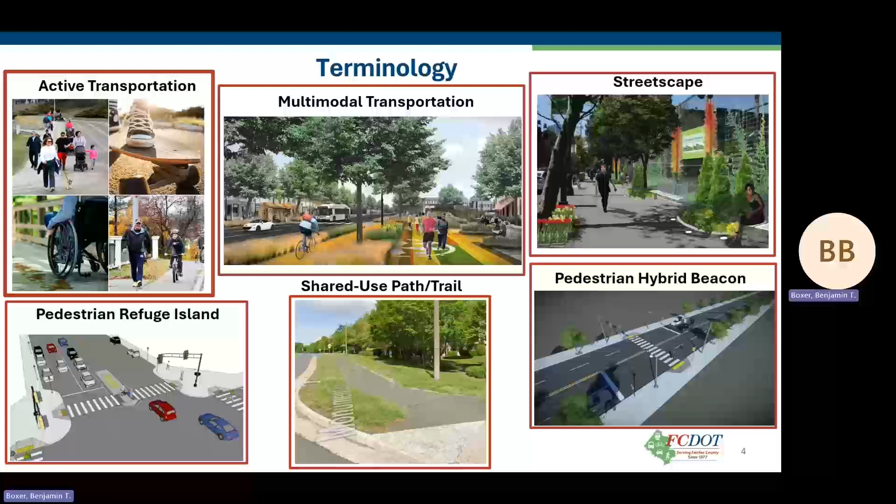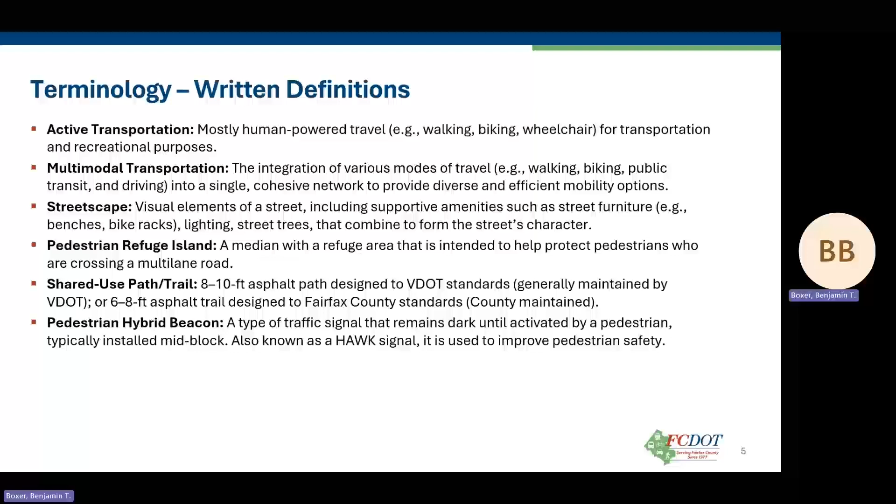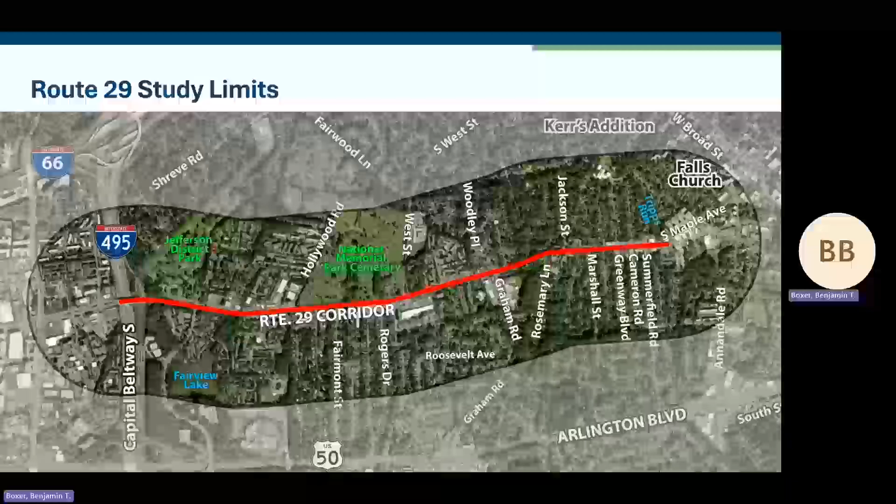Let's talk about why we're conducting this study. Route 29 is a complementary roadway to both Route 50 and I-66. With capacity upgrades recently made to I-66 and with Route 50 being a limited access roadway, Route 29 could focus on active transportation and transit use.

As part of this study, we're evaluating the pedestrian and bicycle access to Route 29 and aiming to provide safe and comfortable facilities while not impacting the traffic flow. Existing transit facilities will also be evaluated to include better bus stop amenities and improved access to transit. In certain segments, Route 29 includes service lanes that are primarily designed for vehicular access, but could potentially be used for sidewalk and cycle path improvements.

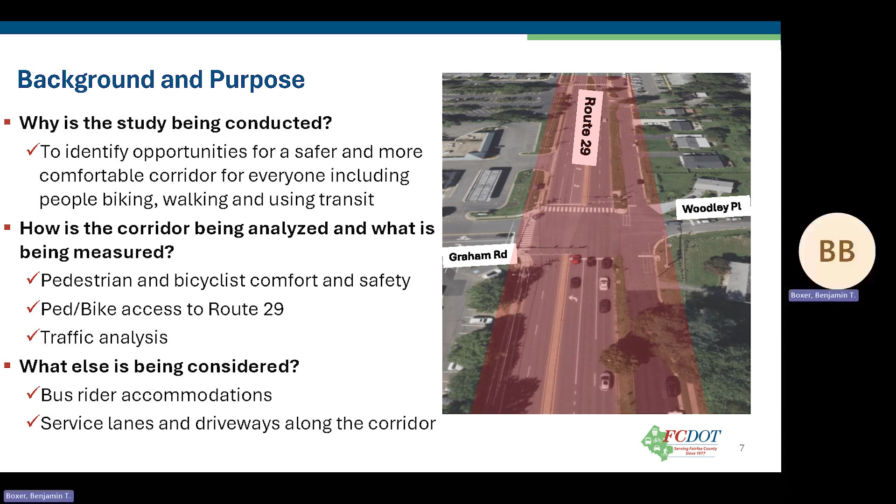In summary, our goal for this study is to create a better connected network for all users by filling gaps and providing safer and comfortable facilities, improving pedestrian and bicycle activity and transit usage, increasing driver awareness towards all users, and ensuring that the community's goals and actions are aligned.

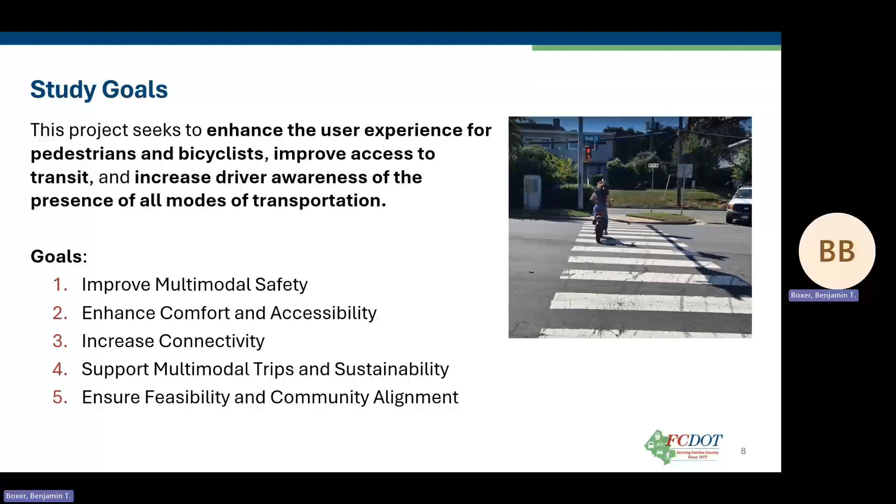Let's talk about the steps we will use to conduct this study. We are currently in the process of conducting an existing conditions analysis, which includes the assessment of all existing facilities for all users, including pedestrians, bicyclists, transit, and vehicles. Your perspective and experience is very important in this stage of the process.

We would like to know your concerns based on your day-to-day travel needs, which will help us identify improvement options. We'll talk about how you can share your thoughts in just a few moments.

After processing the feedback and completing the future conditions analysis, we will hold another round of public meetings with recommendations for improvements, possibly by early spring 2026. After receiving feedback, we will work on the final recommendations for the corridor. Some improvements could be identified as short-term, while others could take longer to implement. We hope to wrap up the study by fall of 2026.

We see this as creating a 25-year plan for improvements, but funding availability and project prioritization will determine how long it could take to implement the improvements. This could change depending on the improvements identified as part of the study.

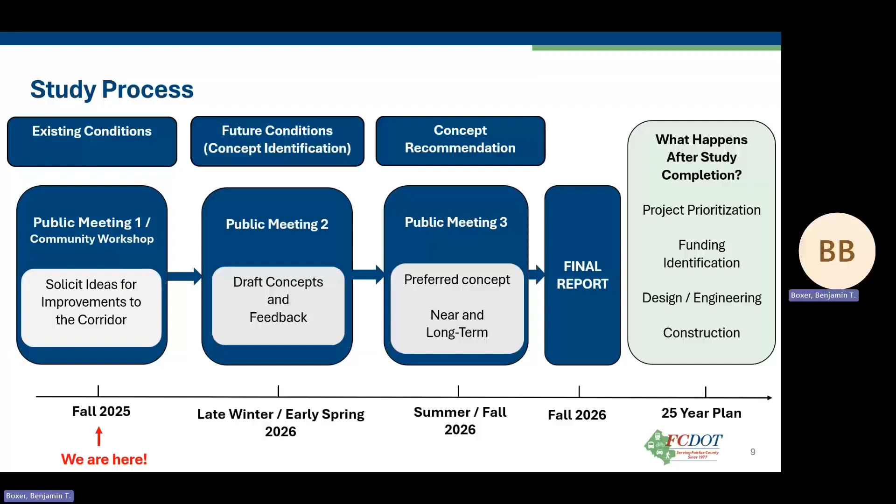Any recommendations like repaving and restriping, which are small-scale projects, could take less than 2 years to implement. More extensive and larger projects with substantial redevelopment upgrades may require additional resources, such as funding and staffing, and therefore take longer to complete.

Here's a few quick details to know about our study area. First, Route 29 is a 4-lane roadway, 2 lanes in each direction. The study area includes 8 signalized intersections. The speed limit is 40 miles per hour when traveling westward and 30 miles per hour traveling east.

The study area includes 1 Metrobus route, Route F50, with service every 30 minutes during weekdays and every 45 minutes during weekends. And the average daily traffic along the corridor is a little over 20,000 vehicles.

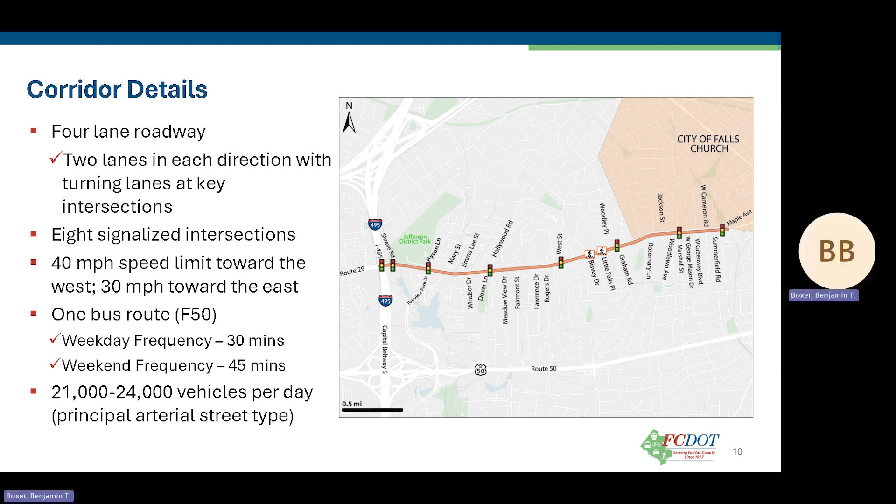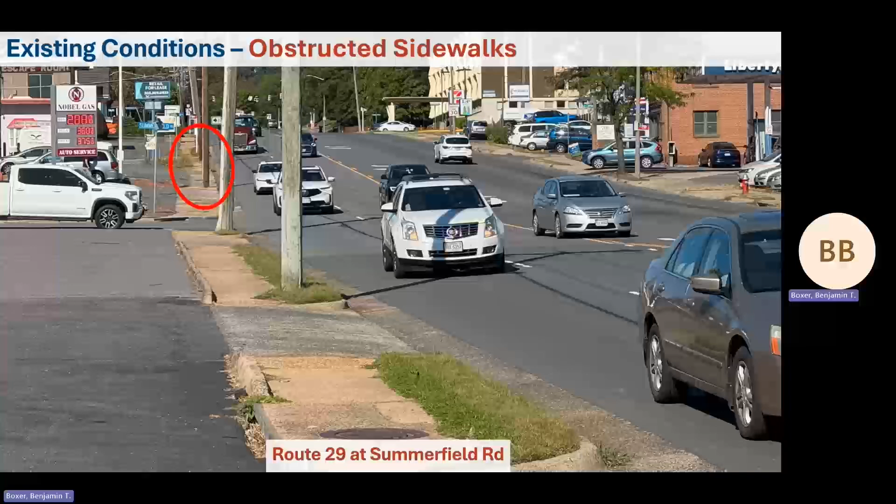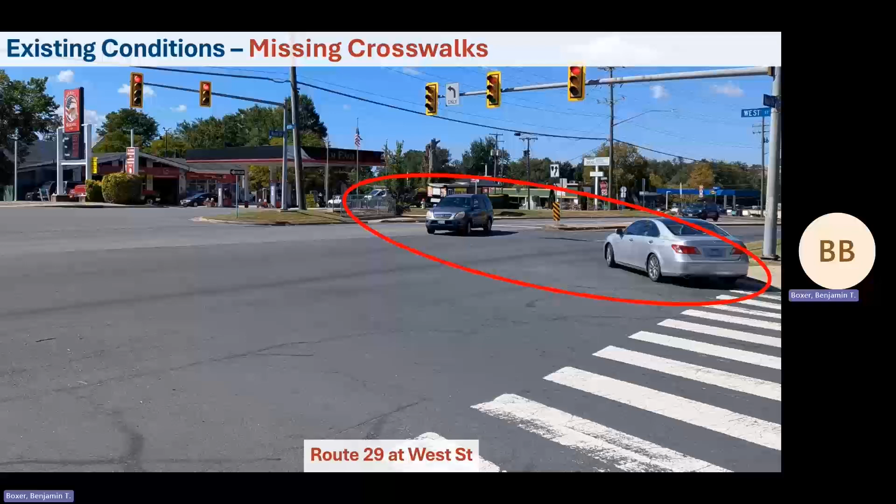Finally, this map helps illustrate the distance between crossings along the study corridor. There is a big gap of over 2,000 feet in certain segments between Hyson Road and Hollywood and West Street, and between Graham Road and Marshall Street. There is definitely an opportunity to bridge the gap between these crossings.

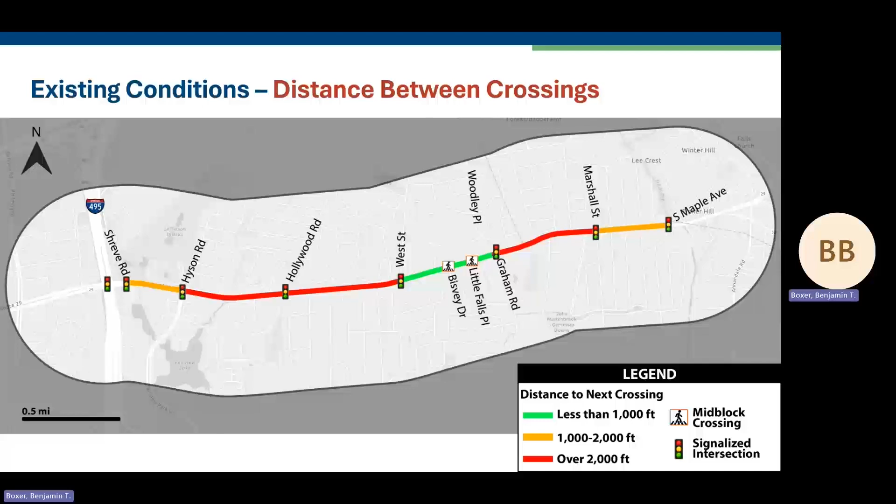Now let's take a look at what we anticipate over the next few months. We'll be working on our first round of community engagement through the end of this year. That will include a community survey, which is now available and will run through December 19th. We encourage you to participate and invite you to please share this information with your friends and neighbors.

We'll also be completing our existing conditions analysis later this year. In the winter, we expect to have analysis results to share for the existing and future conditions, along with recommendations for improvement concepts with the feedback we received.

We expect to conduct another round of outreach in early spring 2026 to receive feedback on the proposed recommendations. Please be sure to visit our project webpage to follow the progress on the study and see the latest information and opportunities to participate in this effort.